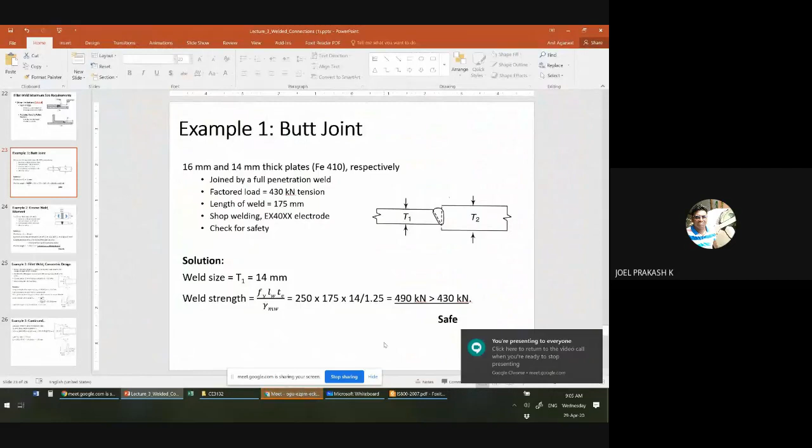Good morning, everyone. In the previous classes, we were talking about welded connections, and today I want to discuss some examples. Last time we discussed one example that I will quickly go over again.

This example was about a butt joint. A welded butt joint obviously means that a groove weld is used. The groove weld is of this bevel shape - one surface has not been beveled, but the other surface has been beveled. If both surfaces were beveled, then it would be a V groove. But this one is a bevel groove.

That does not really matter - that is a detailing requirement. From the design point of view, from load calculation and strength calculation point of view, it doesn't matter whether it's a bevel, a double bevel, a single bevel, or a V, or what kind of groove it is. That is more like a detailing requirement during fabrication.

It's a full penetration weld, that is given, and there are two plates of thicknesses 14 mm and 16 mm respectively, so T1 is 14 and T2 is 16 mm. The load is also given, 430 kilonewton tension. Length of the weld is 175. So in the out of plane direction, the width of the plates and the length of the weld both are the same, 175 millimeter.

Shop welding has been done. If it is mentioned that it is shop welding, then we know that the factor of safety to be used is 1.25.

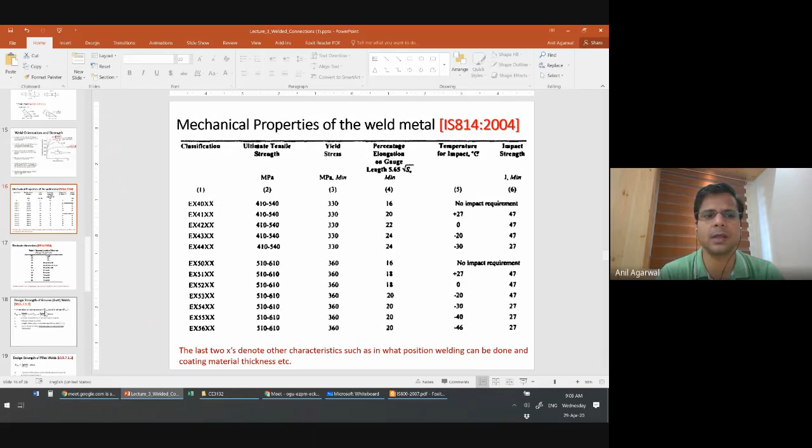Going back to that slide which gives details of the different types of electrodes - electrode Fy for EX40XX was 330 MPa. So between 330 MPa and 250 MPa, 250 is smaller.

250 multiplied by the cross-section area - cross-section area is basically the width of the plate or the weld, length of the weld, you can also say it is the width of the plates - multiplied by the effective size of the groove, 14 mm, divided by 1.25, which turns out to be 490 kilonewton. That is greater than 430 kilonewton, which was the demand. Therefore, this connection is safe.

Another example we will do again on a groove weld. As long as we are dealing with groove welds, we will only have to deal with Fy values - we don't have to worry about Fu values.

In the previous case, you had two plates connected with a groove weld, but the stress everywhere was uniform because it was subjected to pure tension. In this particular case, it is not pure tension, it is bending moment. The factored moment is equal to 19.5 kilonewton meter.

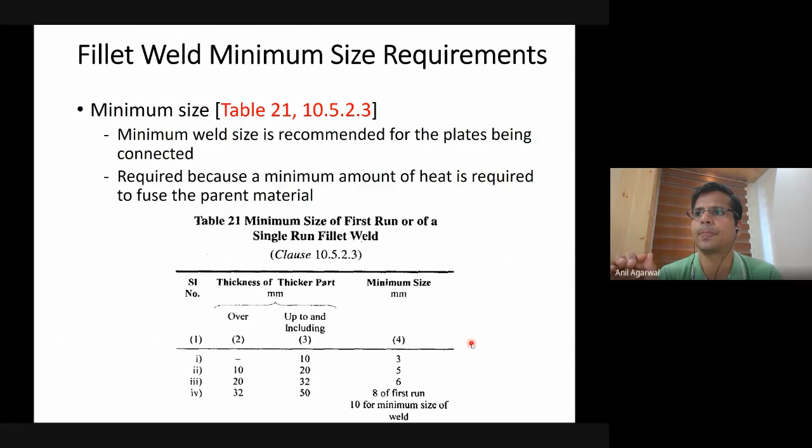Let me go back to that slide. If we do a single pass weld, then depending on the thickness of the thicker plate, the weld size should be at least a certain value. Here, my angle - how thick was it? 8 mm. So the angle is 8 mm thick, and the gusset plate is 12 mm thick. So we need to take the thickness of the thicker part, which is 12 mm. For 12 mm thickness, from the second row, the weld should be at least 5 mm if it's a single pass weld.

So in the question, you have been asked to use a 6 mm weld. That is okay, because it should be at least 5 mm - even the first pass should be at least 5 mm. The purpose of this requirement is so that there is enough material - in the first pass itself, I am depositing enough molten material so that the base metal is able to fuse. The second requirement was the maximum size of the weld.

Actually, first I'll go into the minimum size requirement. This requirement says that when you have this kind of weld - you can see this is very similar to our situation - we have an end fillet and two small side fillets. This particular requirement allows you to vary the size of the weld from side to end, but you don't have to, because it's already given as equal on 3 sides, 6 mm on every side. That is fine. But for the end fillet, the requirement is that the effective thickness of the weld should be at least half the thickness of the plate. This plate is your angle leg, which is 8 mm thick. Half of it is 4 mm, and your weld size is 6 mm, so the effective thickness for that weld will be 6 divided by square root 2.

So 6 divided by square root 2 is how much? Approximately 1.4, so 4.2 mm. So the effective thickness is 4.2 mm, and half the total thickness of the angle, which is 8 mm, is 4 mm. So we are satisfying that requirement. Therefore, the weld size is appropriate.

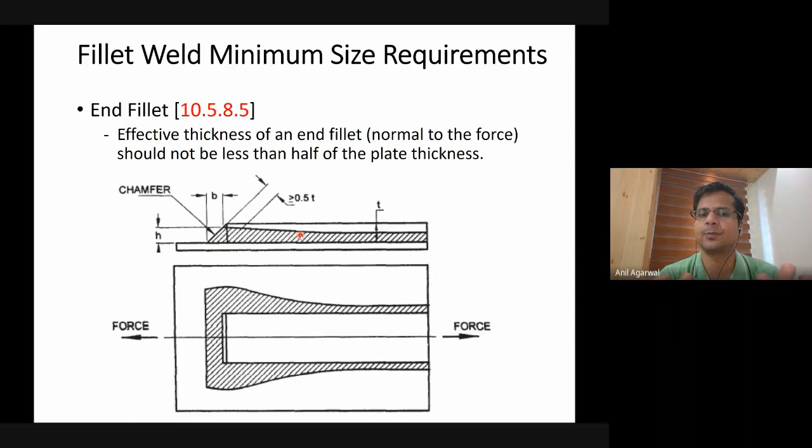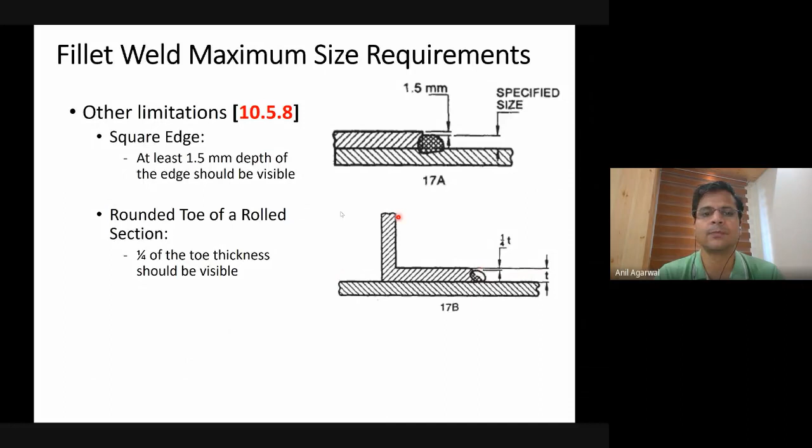In addition to that, there are requirements for the square edge and the toe edge. In this case, for an angle, you have both edges, and for each one please remember the requirement: for a toe edge, 1/4 of the thickness should be visible, and for the square edge, 1.5 mm should be visible - at least these two amounts will be visible. Now if you look at this case, you have a one-side weld on this side, similarly one side weld on this side. So both of these are square edges, but this one is the toe edge. So the 6 mm weld should be able to satisfy both these requirements.

Let's check. The angle thickness is 8 mm. 8 minus 1.5, because this is a square edge, gives 6.5. So the weld is smaller than 6.5 - that's a good thing. So 2 mm is visible here, but only 1.5 mm had to be visible, so that is satisfied. On this edge, the thickness is 8 mm, and 1/4 of 8 mm is again 2 mm - so 2 mm should be visible and 2 mm is visible. Both these requirements are satisfied. So the 6 mm weld will be appropriate - we can go ahead with it.

Okay, so now we move forward with the design.

For a fillet weld, the design strength is equal to Fu Te divided by root 3 gamma mw. Gamma is the safety factor. Fu is the ultimate stress, the minimum of the ultimate stress of the base metal and the weld, so we use 410. Te is the thickness, or the size of the weld divided by square root 2, approximately 0.7. So that's 0.7 multiplied by 6 divided by root 3, 1.5.

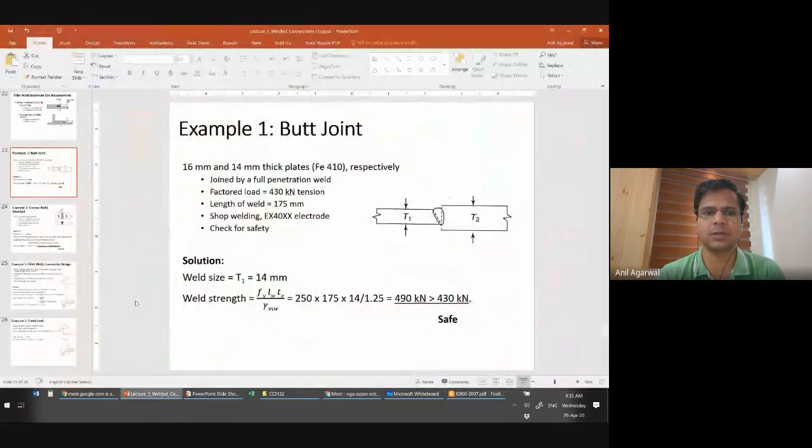Yeah, so this is a hot rolled section. The number given to you was a hot rolled section, ISA, that is Indian Standard Angle. A hot rolled section, if you go to the code, will show you the shape. If you go to the table which gives the list of all the ISA sections, let me see if I can find this particular ISA section in IS 800 also.

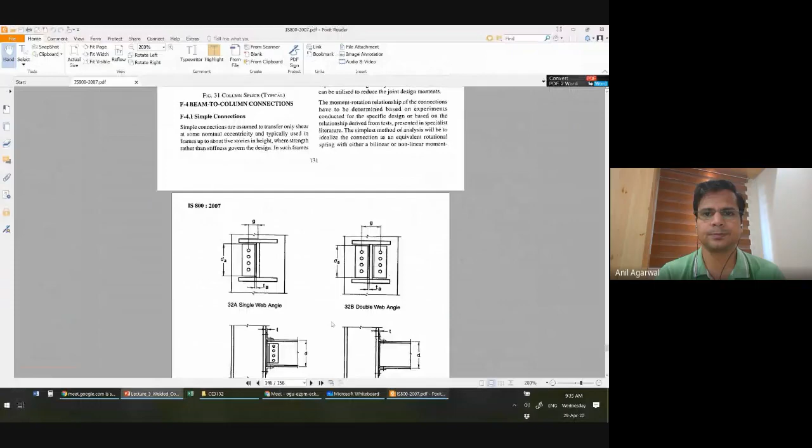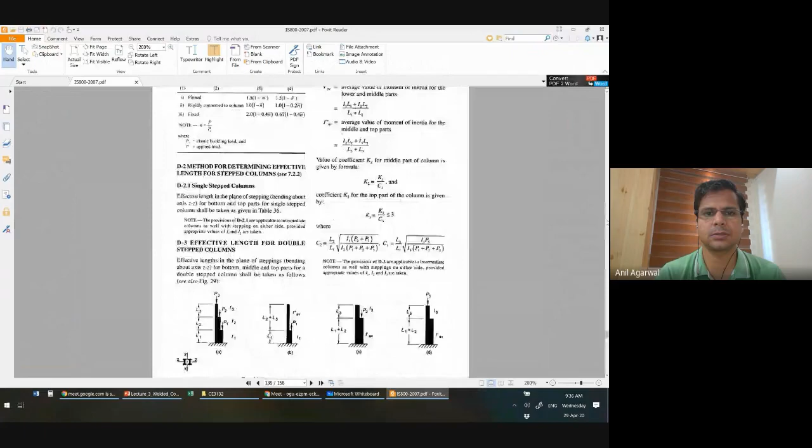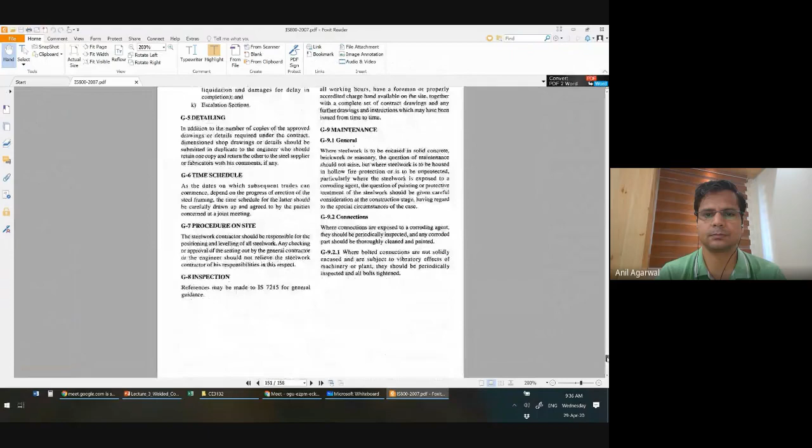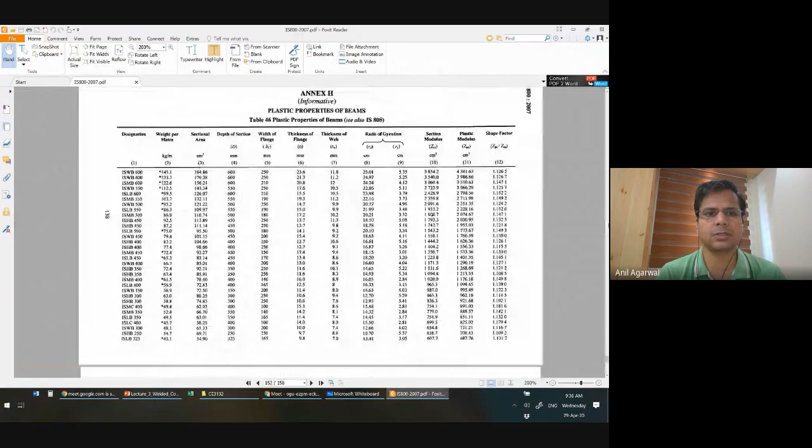Does anybody remember which annexure has all the cross sections? There is one annexure with all the cross sections. There will be respective tables. There are various codes which have all these cross sections. Our code gives you only, like IS 808, it is there. IS 808.

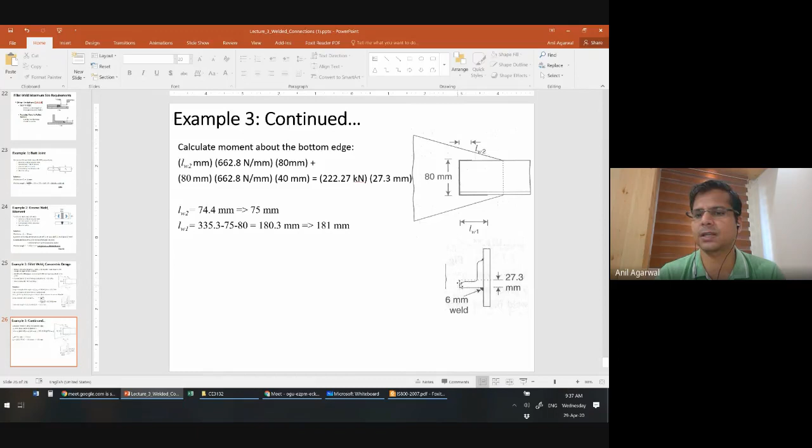So this is of course a square edge also. This edge, you can see it's a square edge. If there was a connection to be welded here - maybe you cannot see my mouse very clearly, I'll project - if you had to do some welding here, in this case you are not doing any welding here, but if you were to do any welding, this will also be a toe edge because you can see that it is rounded toe. Here you are doing a weld, that is this edge, same as here.

So here this is a rounded toe. You are doing a welding here, this is a square edge, and also you are doing some welding here at the end. That is, you have to cut it in the shop. It doesn't come in that shape from the factory. So when you cut it, or even the shape that comes from the factory, it has been cut already. So when it is cut, it will be a square edge. It will not be a toe.

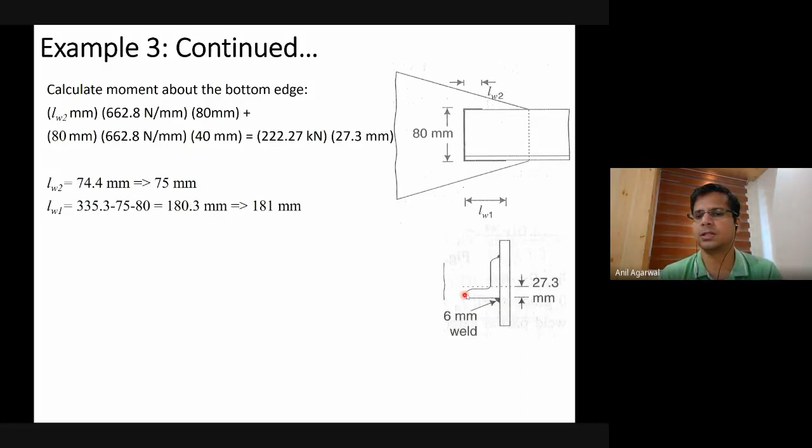So toe is only a product of rolling process. When the sections are rolled, the cylinders or dies through which it has to roll and achieve this shape have these curved surfaces, from where these angles also get these curved surfaces. I hope that answers your question. Yes sir. Yeah, anything else?

And the use of FU in the fillet welds, is it because of the higher stress concentration? So the question is, why do we use FY for groove weld and FU for the fillet weld? The reason for that, I think I had asked you guys to think about it. Does somebody have any explanation for that? Any reason? Has anybody given any thought to it?

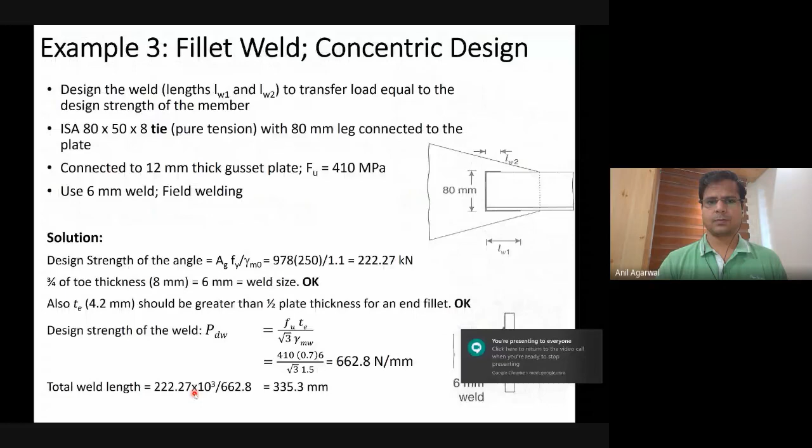Okay, so actually, if you can see, let me go to this - when we define the effective thickness or throat thickness for a fillet weld, it's only one plane. If you move a little bit from here or that plane, your effective thickness will increase, and as a result you will not have the failure there. So the surface of failure is very well defined already. You know exactly where the surface of failure is going to be.

As a result, you may remember through our discussions, when the failure is confined in a very small area - let's say when you have a member in tension and you have holes, you have already defined the surface where the fracture is going to take place. So about those surfaces you need to consider ultimate stress, because a little bit of yielding is okay. Yielding is a more distributed phenomenon, but that is okay. If it is happening only locally, you don't mind. It is the rupture that is the problematic thing, so you need to design for the rupture.

However, when you don't know exactly where the failure is going to take place, for example in a groove weld, we use the minimum of the two FYs. We have to use that because the two materials get mixed, so we do not know where which material exists. Even in this fused portion with the filler material, some of it may also consist of the base metals. So you don't know which FU or FY to use. In this particular case, you don't know whether the failure will be here, here, here, here, here - it can be anywhere because it's almost like a homogeneous material. Since you don't know exactly where the failure will be, you have to use the FY value.

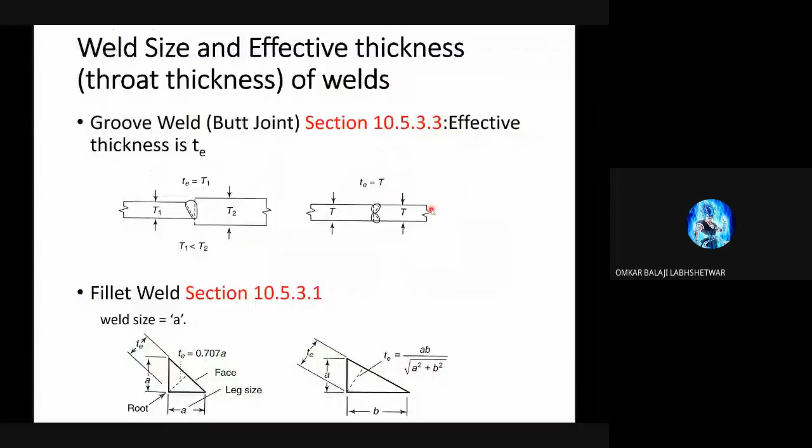Anything else? Sir, in example 2, when we are asked whether it is safe, do we determine the design load or design capacity and compare it with the factored load given? Yes, you can do that way also. Same thing - but here you use whatever is the factored load and from that you determine it.

So basically, what I did was calculate the maximum stress. For maximum stress, I could have calculated - sorry, maximum stress that I have calculated here is the demand.

Sir, that is the demand. You have not calculated the design capacity, right? So you can calculate the design capacity also. Design capacity is 250. In other words, if you know the strength of 250 is applicable, that is stress 250. From that stress you can back calculate the moment. Moment multiplied by y divided by I - My/I is equal to stress. So stress multiplied by I divided by y will give you the moment. You can calculate design moment like that using 250 as the stress value.

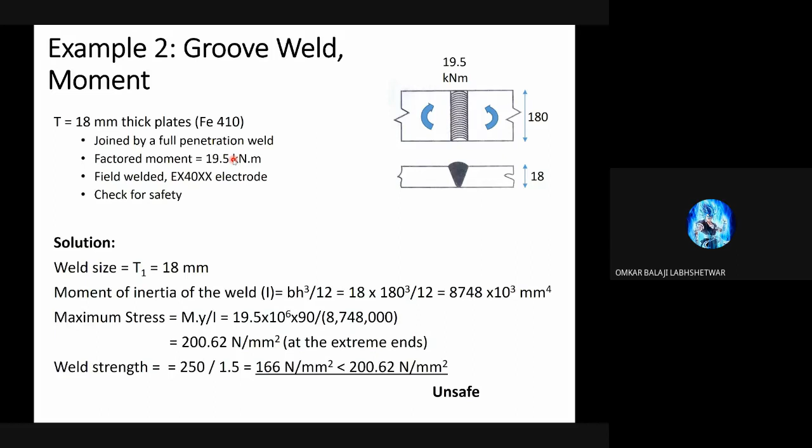Divided by 1.5, that will give you the design moment capacity, and then compare the applied moment - compare that value with the applied factored moment, the demand. That is also the same. I'm just comparing the stresses, but you can compare the moment values also. It's the same thing, you will get the same result.

Okay. Anything else?

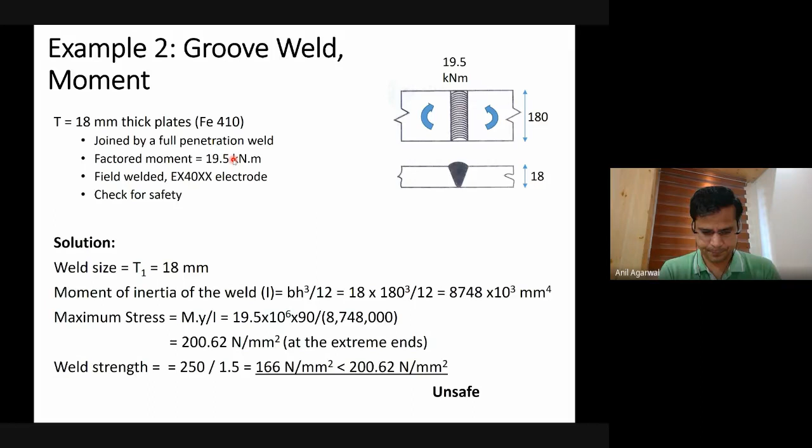Okay, so maybe I can move forward now. The lecture notes are covered - I have one more class to go. For the next class, maybe I can talk about fire behavior, since that was a topic I wanted to touch upon. There are also two intermediate topics I've never been able to teach because this course never gives enough time: one was plate girders, the other composite beams. Since the lecture notes are already shared with you, you can go over them. The other option is fire behavior.

So which one would you prefer me to teach in the next lecture? Of course I cannot cover the entire topic, I can only talk briefly. I've had some time to talk about composite beams. Plate girders are a more involved topic, especially once we start worrying about tension field action. If you're interested, I can talk about plate girders briefly in the next class - of course we won't solve examples, but I can describe it. Or otherwise, if you want, I can talk about fire behavior, high temperature behavior. Which one would you prefer?

Can you vote for it - plate girders, or fire? Okay, because there are not many resources online for fire behavior, and research is picking up right now, so fire would be preferable. Can you guys vote for it? I think everybody should be able to answer. Type your preferences.

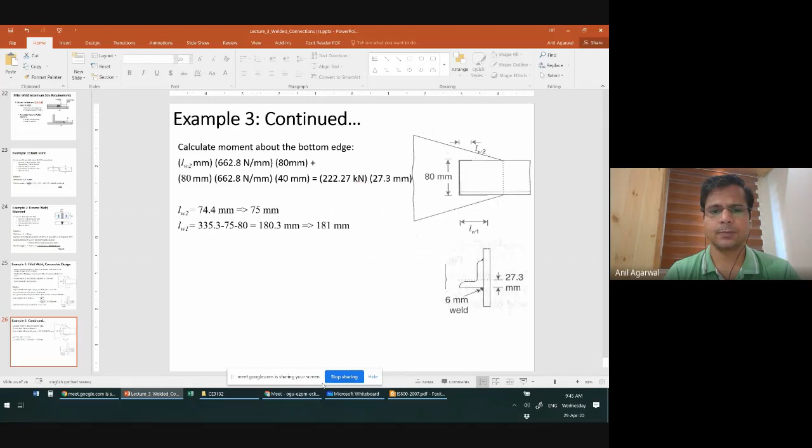Okay, so today I wanted to also discuss a little bit about practical connections. One connection you saw, this kind of connection I just discussed, is very common. Actually, what I'll do now is switch off my camera, because I have to do more writing now and I don't have the lecture notes for that. So I'll switch off the camera and use this laptop as a tablet now. Okay, so let me go here.

You can still hear me, right? Yes, sir. Okay.

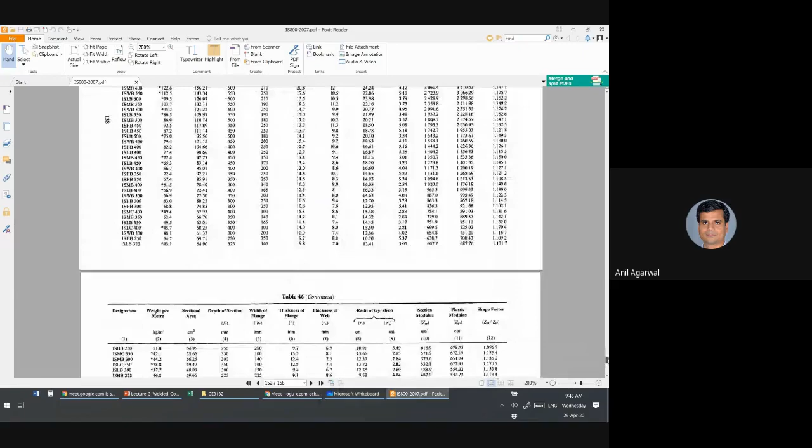So there are various types of connections available, and the Indian code also has one annexure. Let me see how quickly I can reach that. I cannot remember these annexure numbers and all, some people are very good at these things. So this particular annexure F talks about various types of connections.

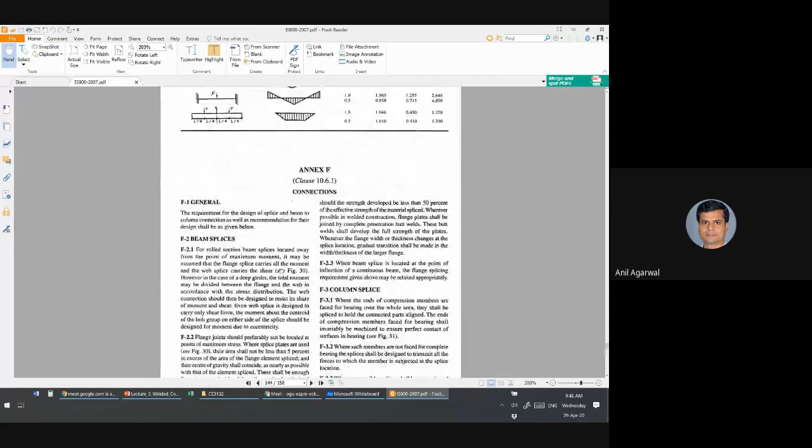So the first part is about splicing. You can do splicing using bolted connections, and this section focuses more on bolted connections. Welded connections are more popular these days, but somehow they haven't provided enough information on welded connections for some reason. Bolted connections are equally popular, but welded connections are getting more popular these days.

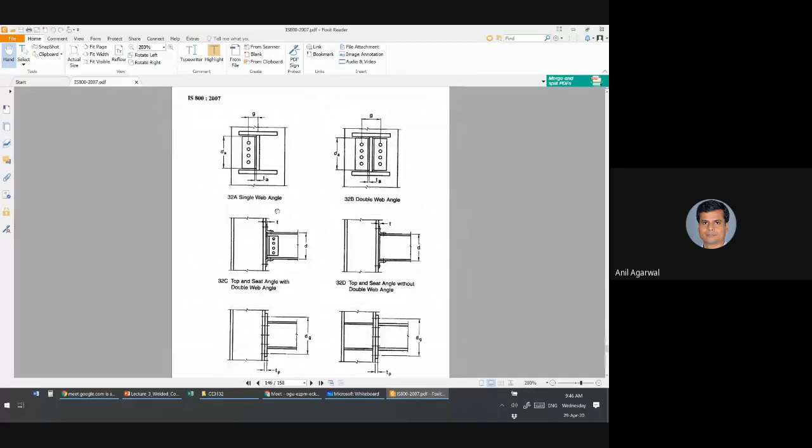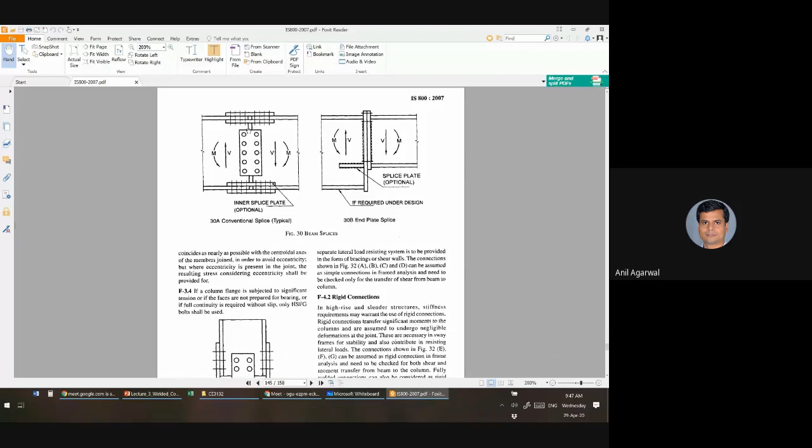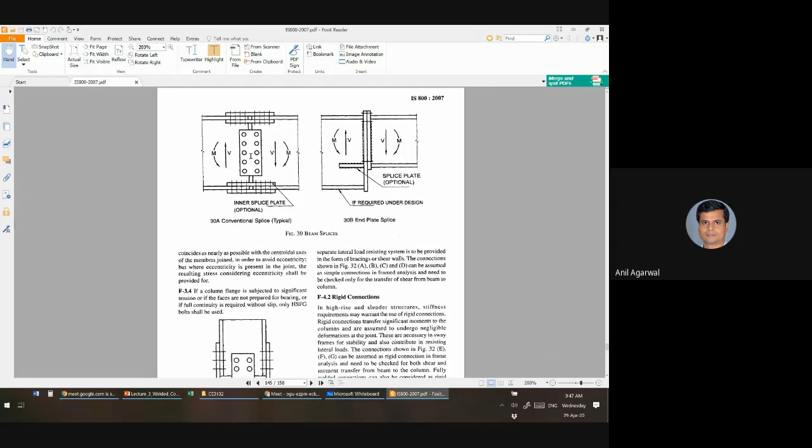Why do you have to provide a joint? Because you don't have infinite length plates. The plates come in particular sizes. The girders have to be transported to the location, so they have to be of a limited size, but the practical requirement may be of a larger size girder. So you have to do splicing.

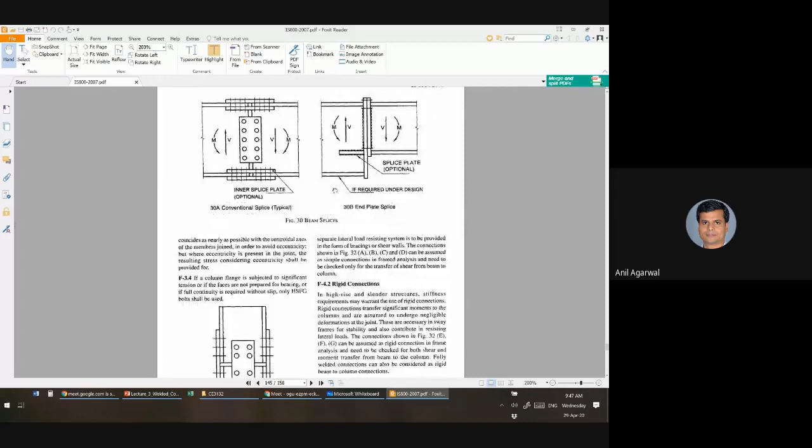So splicing requires, if you have same depth girders or beams, you can do splicing in this way. If you have different depths, you have to do splicing in this way, and then you have to make sure additional stiffeners are applied here. You can see some kind of splicing for a column discussed here.

Also, there are different types of connections between beam and column, and I will quickly talk about the concepts. I won't have enough time to discuss the detailing. So let's say I have a column.

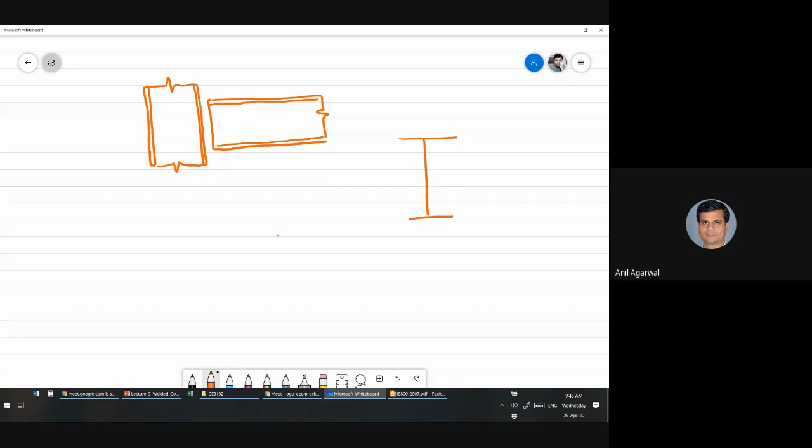Oh wow, this is so much better writing in tablet mode. So you have a column, and I want to connect a beam with it. There can be different ways of connecting this beam with the column. Or you may have a requirement where one beam is the primary beam supporting another beam, which is a secondary beam.

So in such kind of connections, these are very common in building connections, common types of building connections. You may have different purposes. Sometimes, for example, this beam column connection, I may want to make it a moment carrying connection.

So for example, if this is the frame, this is the beam, and these are the columns, and there is a lateral load applied, then for it to have any resistance, it has to be a moment frame. A moment frame requires you to have a rigid connection between the beam and the column. And if the connection is rigid, that means you should be able to transfer the shear forces, and also transfer the moments.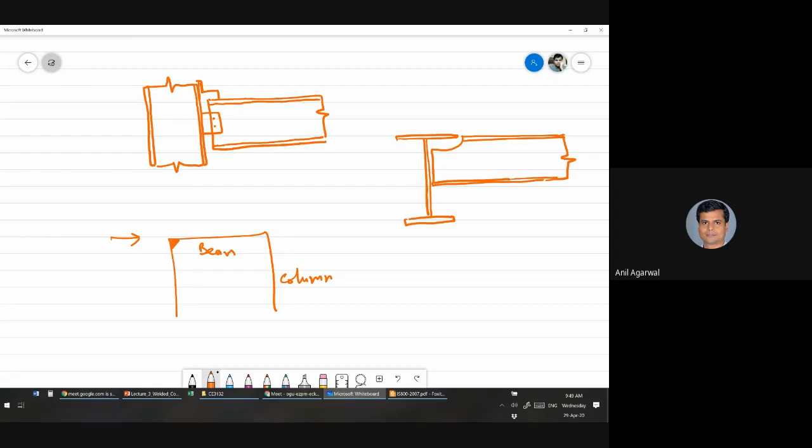So how do you transfer the moments? There are ways to do it. One way is to provide angles, connect the angles to the beam and connect the angles to the column. Usually that is not considered a very strong way to transfer the moments, and usually it is not classified as a rigid connection.

An alternate approach is to use a T-section and connect it from both sides, and you can weld them. Another alternate approach could be to bring this beam close enough to the column so you can directly weld it, and that is very common in the USA. They directly weld it, bringing the beam all the way as close to the column as possible, and sometimes they have to use a backup plate a little bit, and they can directly weld it.

Alternatively, you can design this connection as only a gravity load bearing system. So what you may have is, let's say I have this frame wherein one bay has some kind of bracing system, and this bay is purely a gravity load bearing system. It does not have to have any lateral load resistance. Any lateral load applied here will be transferred or resisted by these bracing systems, and this particular frame can be purely a gravity load bearing system.

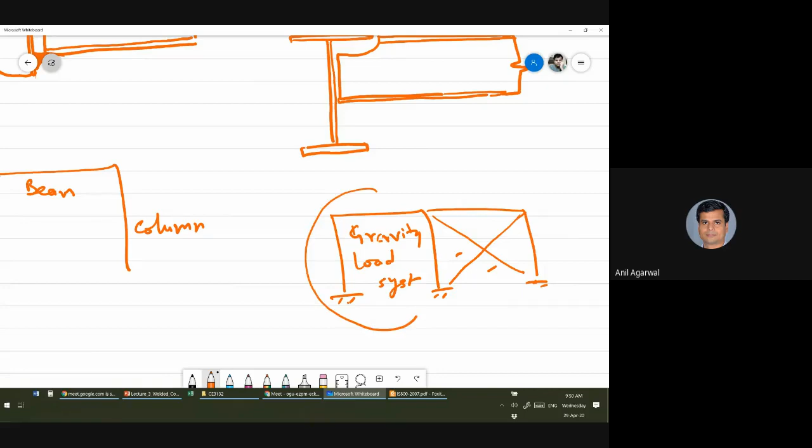So in this kind of situation, all I have to do is provide a connection. It is getting very messy. I just need to provide a shear connection. Since the shear force mostly acts on the web of the beam, all I have to do is connect the web of the beam to the column, and that is considered good enough. The calculation for this kind of connection is very easy. In India, you are not allowed to use a single plate, which is usually called a web cleat.

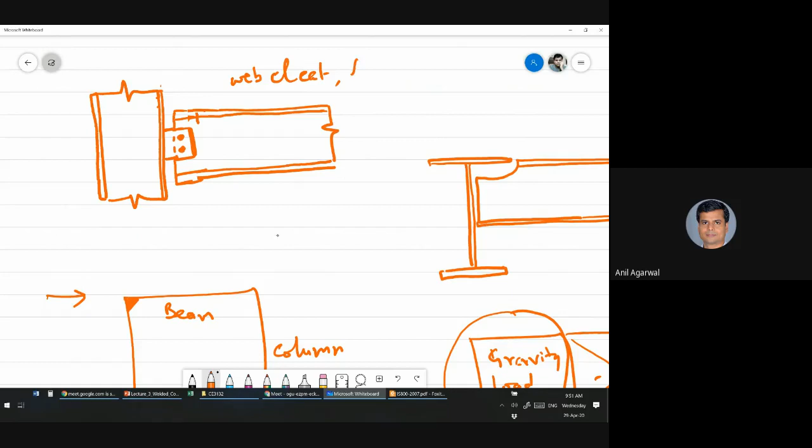In the US, that is a common practice, also known as fin plate. In India, you are usually required to use at least one or two angles.

Looking from the top, this is the flange of the beam, this is the flange of the beam, and there is a web in between. There has to be one angle here, as per Indian requirement. And this is the column flange.

This is the column. So these angles have to be welded or bolted to the web of the beam, and then these can be welded or bolted to the flange of the column.

These kind of connections are usually known as shear-only connections, because they are designed only to carry the shear force. If you apply any moment here, this beam will very easily rotate. So at the end, you can almost assume there is no moment resisting capacity, or there is a moment hinge at the end. It can resist only shear.

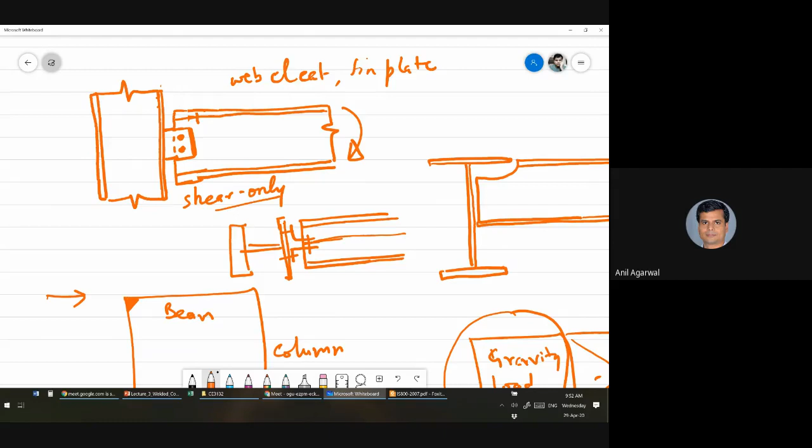These kind of connections are called shear connections. The earlier type of connection, where the top flange and the bottom flange were welded, that kind of connection was called a rigid connection. And then there is a variety in between, known as semi-rigid connection.

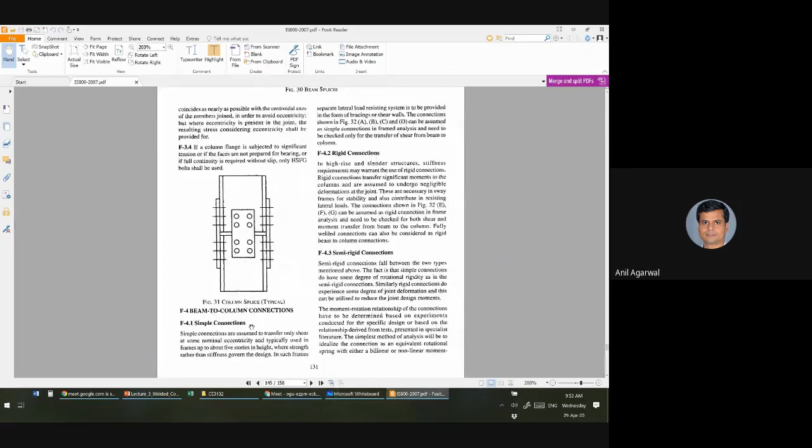I would recommend you to read through this annexure F a little bit. It has three types of connection: simple connection or shear-only connection, rigid connection, and semi-rigid connection. Various types of experimental studies have been conducted, which are used to classify them.

Basically, none of these connections are 100% rigid, and none of them are 100% simple. All of them have some moment resistance. So based on what range that moment resistance lies in, they are classified into three categories: rigid, semi-rigid, and flexible.

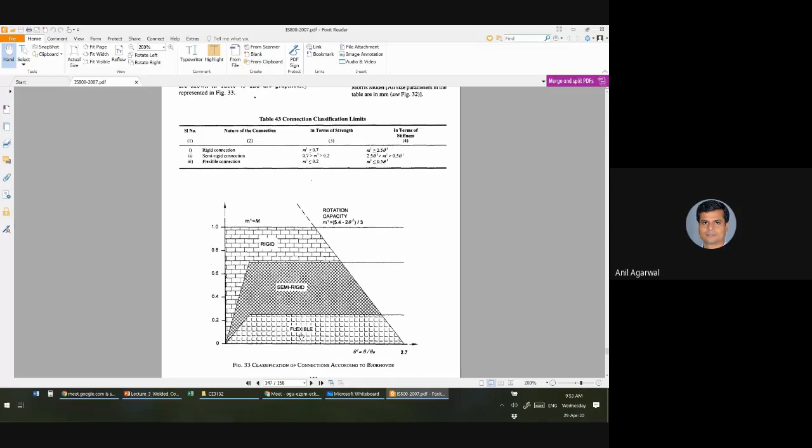Any questions about this? I think I would not have enough time to discuss the designing protocols for these different types of connections. I hope you are able to understand the difference between simple connection and rigid connection - that is more critical for you.

I had to cut it so that the top surface of the two beams are at the same level, so that we can have a floor here. Otherwise I could always put this beam, the secondary beam, under the primary beam. But if I do that, the two beams will not be exactly at the same level, so the floor will be uneven.

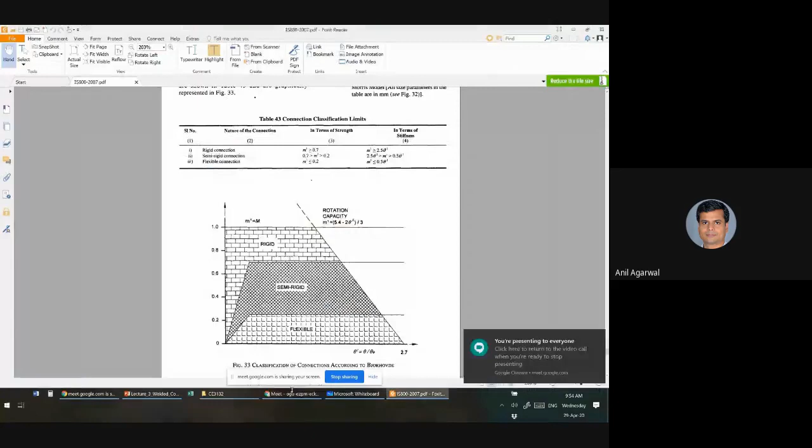Yeah, so the cutting is done in a very particular manner. It has to be done very smoothly so that you don't introduce any stresses. Additionally, what happens is that the beam at the ends is carrying only shear force.

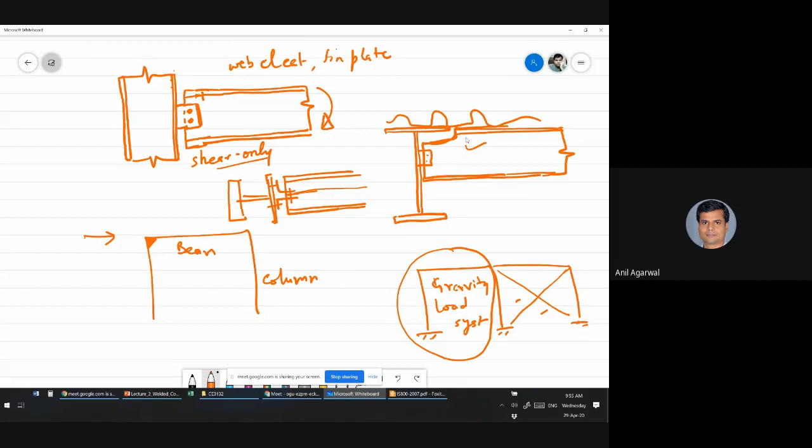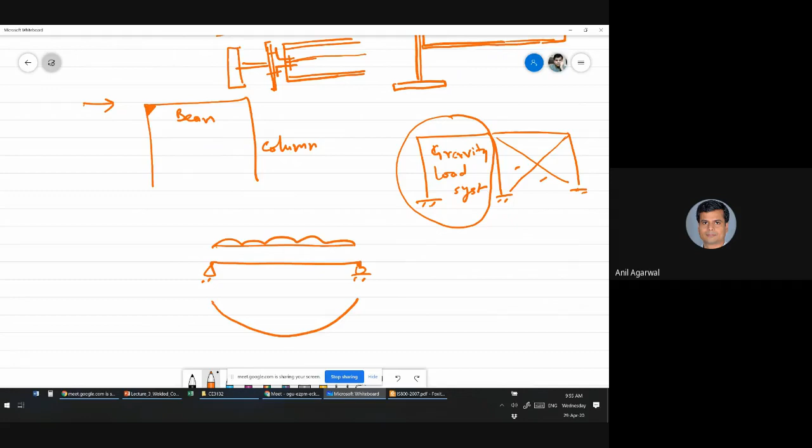If you look at a beam which is simply supported, imagine that this is the secondary beam and it is simply supported. What kind of stresses do you have here if you apply any distributed loads or gravity loads? The bending moment diagram is this. You have zero stresses from the bending moment diagram at the ends.

Shear force diagram is this - sorry, it's very poorly drawn again. The shear force diagram looks like this. So you have large shear force demand at the ends.

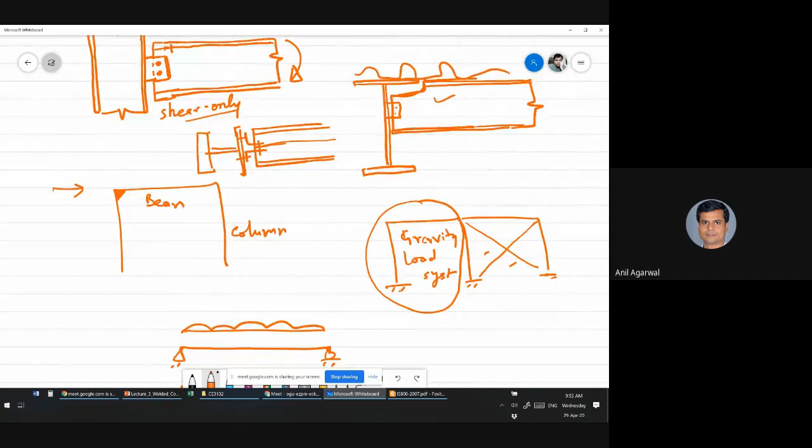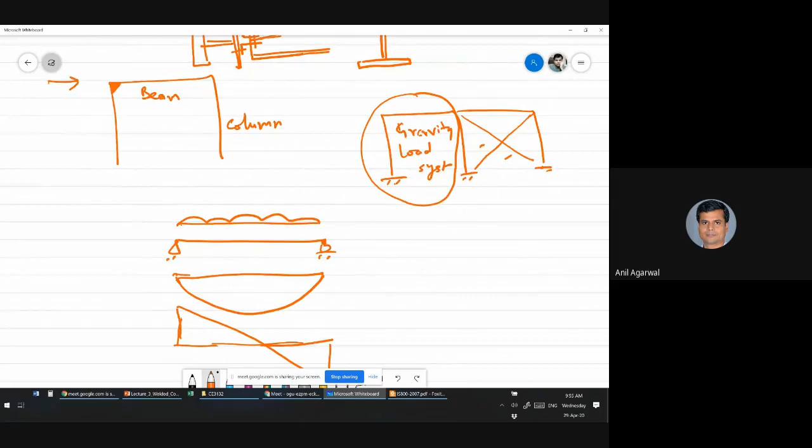Most of the shear force is resisted by the beam - by the web, sorry. Most of the shear force is resisted by the web, and you are not harming the web. All you are doing is basically cutting off most of the flange. The flange offers resistance against the moment, and you don't have much moment demand at the ends. So this is an acceptable approach.